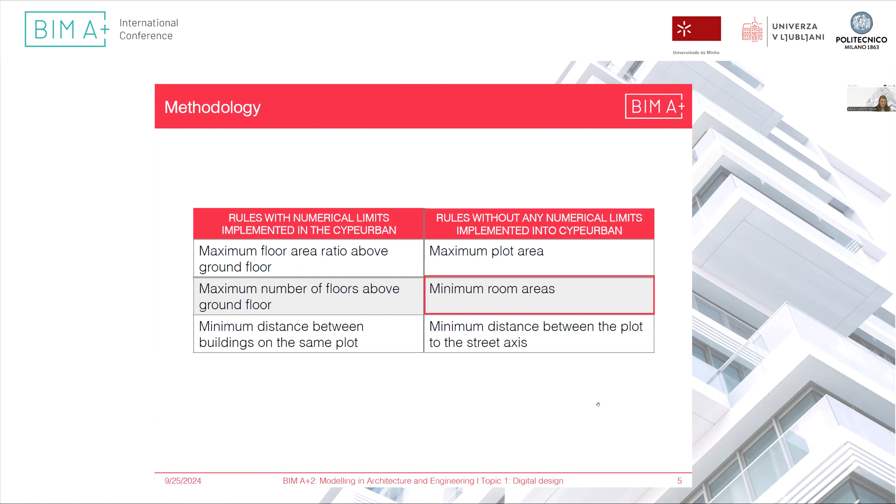These are the 6 rules that we implemented in the software. I'm going to show the minimum room areas in the presentation.

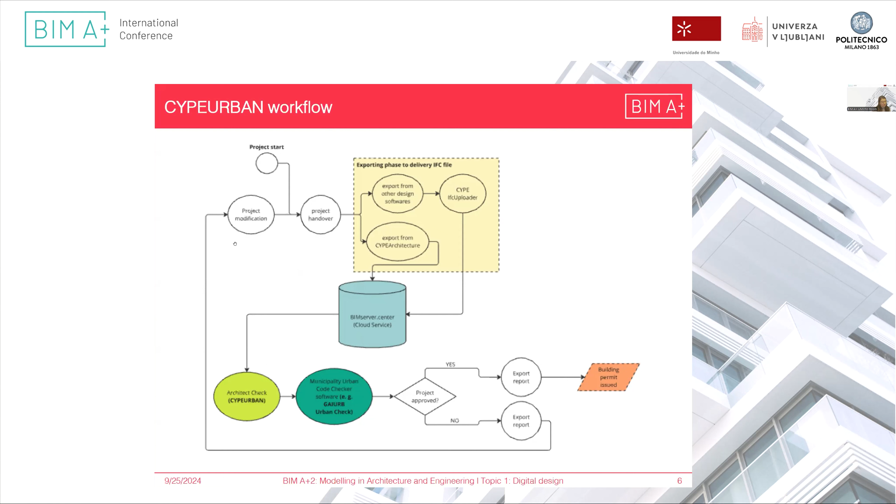This is the CYPEURBAN workflow. We have the project start and the project handover to send to the municipalities. In the exporting phase, if you're using solutions like Revit or ArchiCAD, we can use CYPE IfcUploader, but in CYPEArchitecture you can send directly to BIMserver.center, the CDE from CYPE, and send to CYPEURBAN. Here you can check the legislation of the municipality and send it to a solution at the municipality to check if this legislation is compliant. If the project is approved, we have a report and the building permit issued, but if the project is not approved, we have also a report and a project modification to restart the workflow.

Regarding the rule interpretation and inserting the limits into CYPEURBAN: for minimum room area, we have this statement. If your room is a kitchen contained in an apartment T0 — T0 being a category in the Portuguese legislation — then the net floor area of your kitchen must be bigger or equal to 6 square meters.

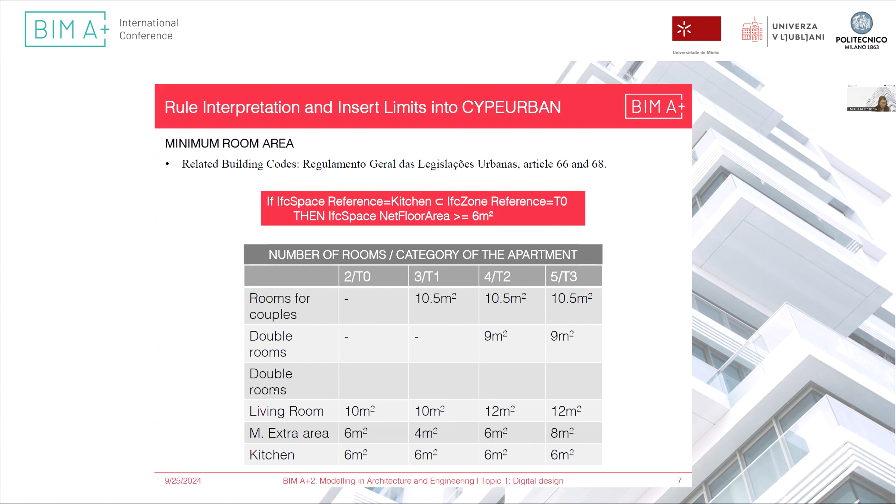Here is a table explaining the legislation. Of course, the table in the legislation is much bigger, but here's an explanation of how the limit is defined in the legislation for each type of room and each category of apartment.

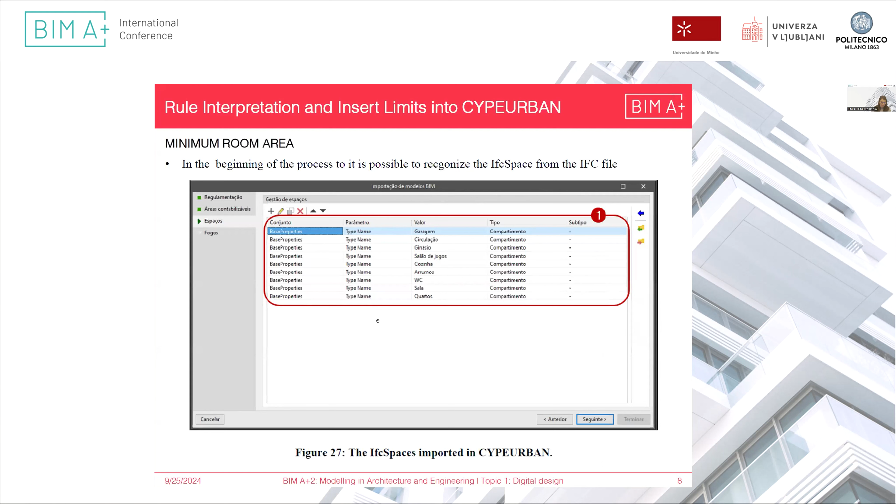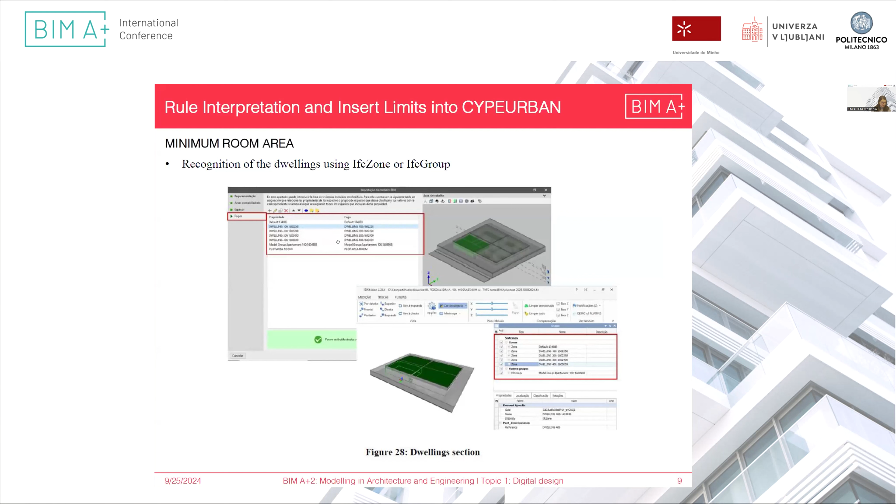Into CYPEURBAN, it's possible to recognize the IFC space using parameters like type name — this is already implemented. Also, we can recognize the dwellings, the apartments, using IFC zone or IFC group — also implemented in the software. Here is a screenshot of CYPEURBAN.

During the case implementation, we discovered a workaround to insert the limits for each type of room. So we have room for couples with a limit of 10.5 square meters, double rooms, and so on. This was discovered during the workaround in the case implementation.

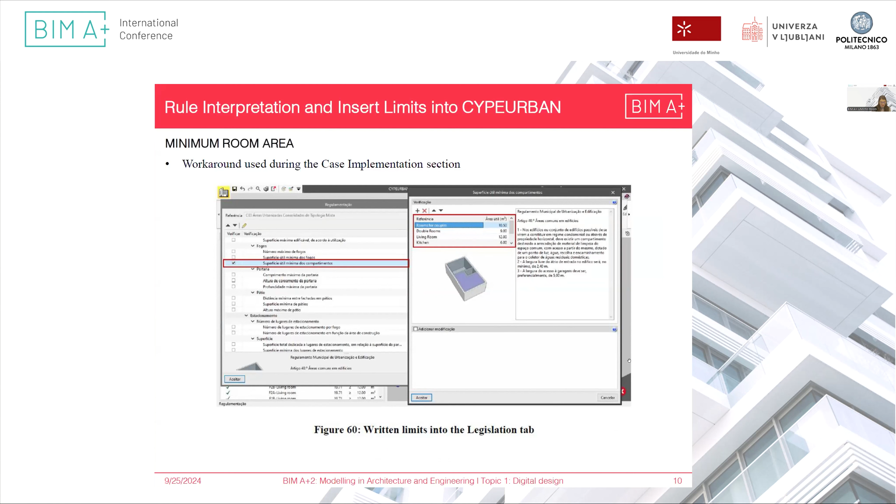In the section to ensure model quality and information, we divided between the architectural IFC requirements and the CYPEURBAN requirements. Here we have the classes IFC space and IFC zone or IFC group. In the IFC space, we need the gross floor area as a predefined type.

And in the Pset space common, we need to input the type of room because we have specific limits for each type. So imagine if you don't insert the correct names like room for couples, and just insert room 1, room 2 — we cannot know the specific limit, because room for couples has a different limit from double rooms. So we need to input the correct names.

Also, the parameter is external. In the quantity sets, we need, of course, the net floor area because we are checking minimum room area.

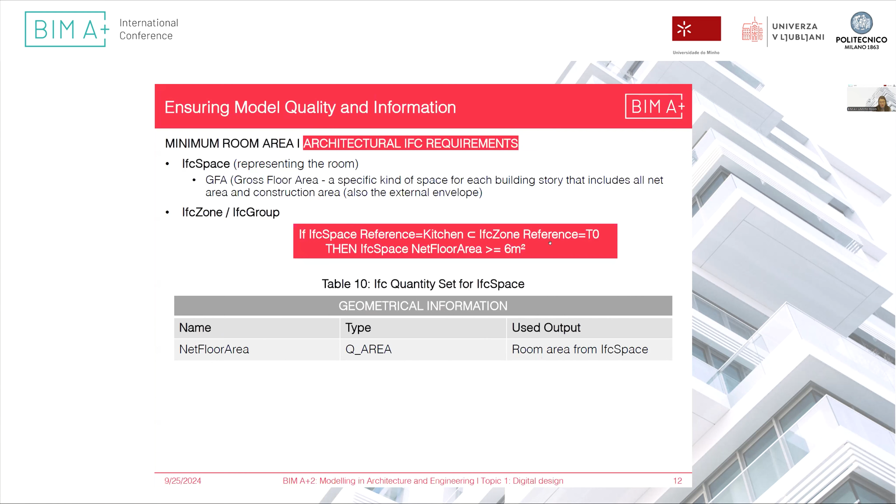In the IFC zone or IFC group, in the Pset zone common, we need to insert the category of the apartment because, as I said, the category is also important — the limit is related to the category of each apartment. And the property is external, as yes or no.

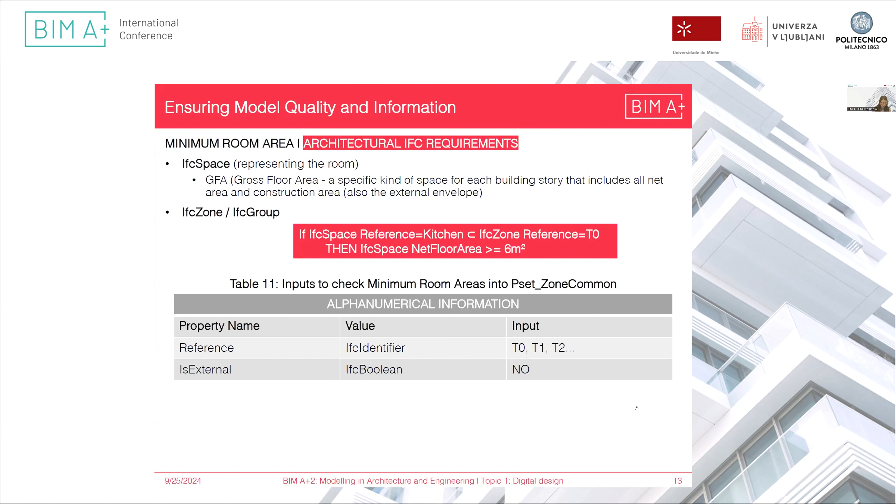In the CYPEURBAN requirements — CYPEURBAN is a software to check compliance with the legislation, so we have the whole workflow to check the legislation.

These requirements are not related to the specific rules we defined, but we need to insert information step by step. So we need to insert the urban area of the project. I believe in all legislation in the world, we need to insert each type of area into the city. Also, we have to configure the countable areas.

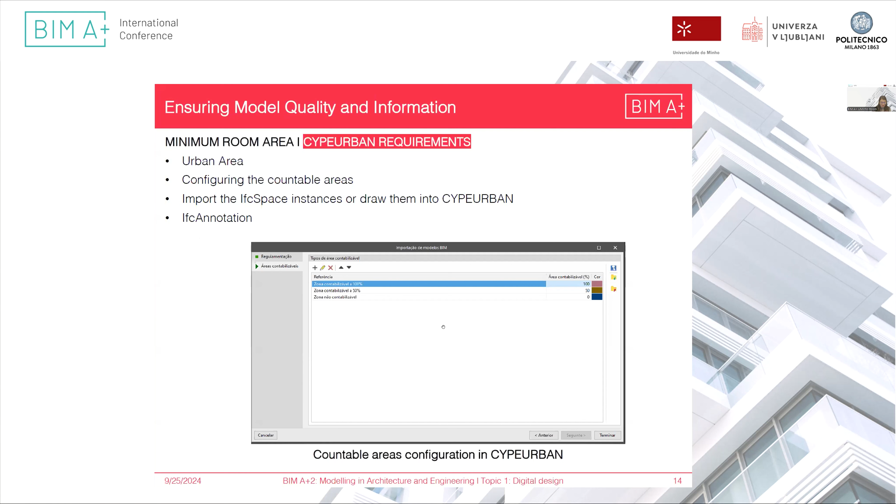Here's the screenshot of the software. Import the IFC space instance, or it's also possible in the software to draw the IFC spaces if there is some space missing in the IFC. Some configuration of IFC annotation is not in the presentation, but it's defined in the dissertation.

We chose Revit as the authoring software solution to explain how to ensure information gets into the IFC. To make sure your IFC file has an IFC space, we can use spaces or rooms in Revit. Spaces are an MEP feature and rooms are in the architectural tab. Both of these elements are conceptual volumes, so they're not like a wall, floor, and so on.

And for both we can set up the IFC parameters, and then we will have an IFC space in the IFC file.

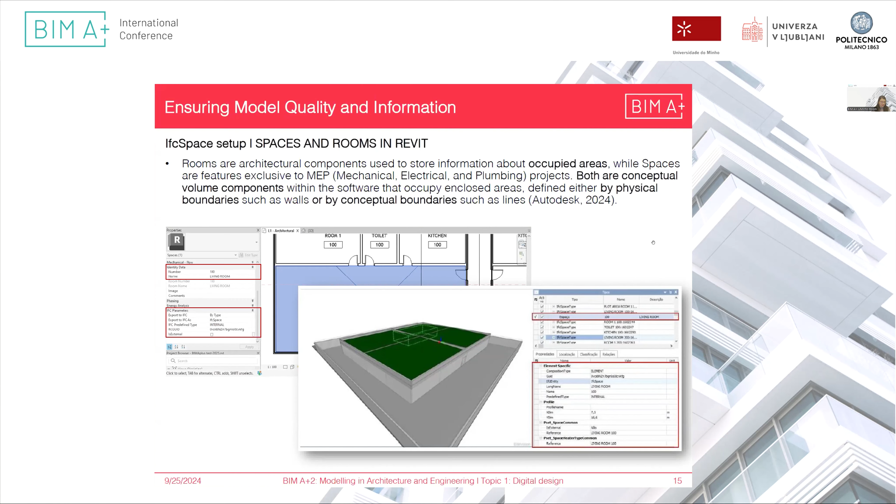For the IFC zone and IFC group, to set these up we have to use zones or groups in Revit. Zones in Revit are also an MEP feature, while rooms and groups can be in other disciplines. I know in other software there is a difference. Again we can set up the IFC parameters, and then in the IFC file we will have the IFC zone or IFC group.

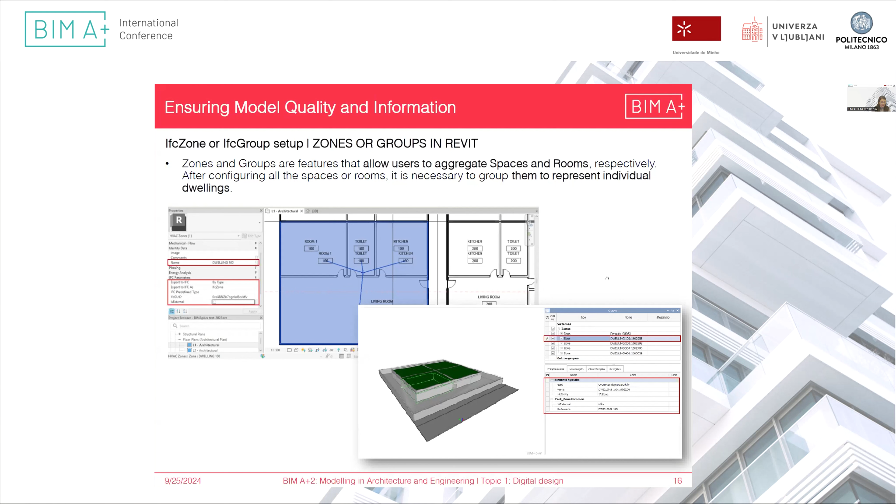It is used to set up the apartment using the IFC zone or IFC group.

For the case implementation, we decided not to use only a house, to have a more challenging project. So we decided on a 7-floor residential building, with only T2 apartments, two apartments on each floor, in Vila Nova de Gaia, as I said.

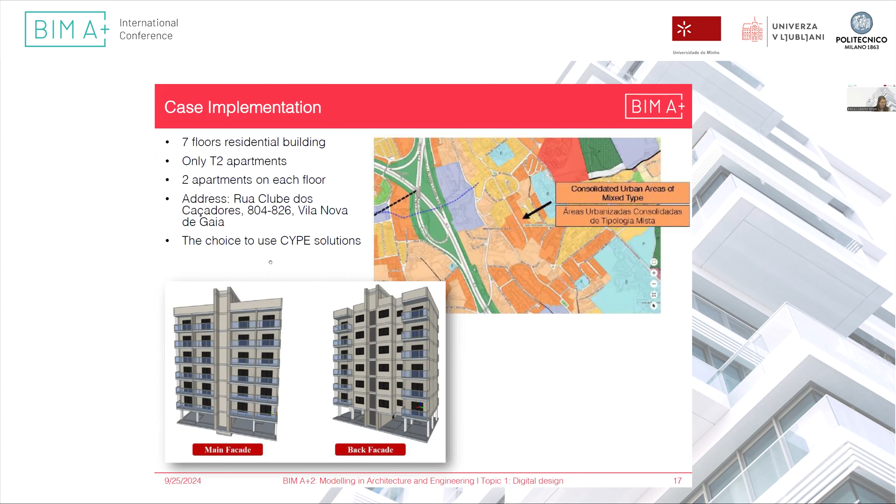As a choice for the dissertation, we used all SIP solutions - CYPEArchitecture, the BIM Service Centers, the CDE, and Open BIM Site as the software tool for modeling the surroundings. This is the project, the facades.

Here is the floor plan. The ground floor is only the access to the project, and then there's a standard dwelling floor with each apartment of a given size.

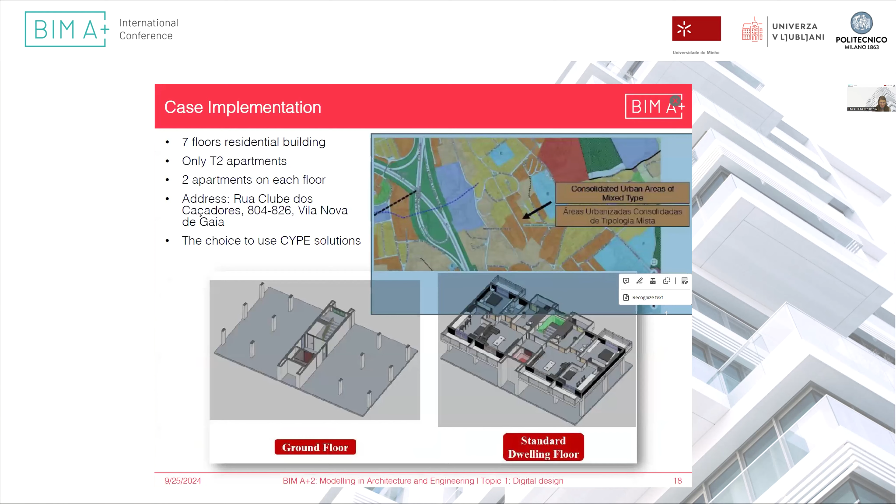Regarding the case implementation analysis, this approach allows us to analyze the software's needs to establish a relationship between the dwellings and the rooms. As we saw earlier, we can recognize the rooms using the IFC space, and we can recognize the dwellings using the IFC zones or IFC groups, but these relationships are not yet built into the software.

There's the possibility of using orthophotos to check distances, though this is less precise than if you model the specific parts of the surroundings, but it's also a workaround. There's also the alternative of drawing an axis or lines into Open BIM Site, the software from CYPE.

The maximum number of floors could potentially be recognized through the actual number of floors above ground, using the IFC BuildingStorey class and the above-ground parameter. So we could check the heights of the buildings and the number of floors using this class, but it's still under development in CYPEURBAN.

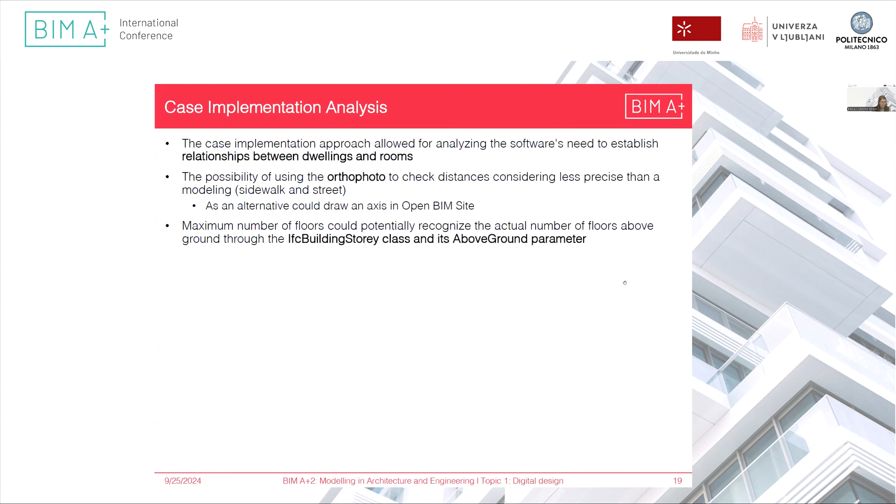For future implementation suggestions for the software, we have the possibility to add the names of the checks. This would be a great improvement for the UX design and user experience.

Another suggestion is to change the owner elements to verification layers or compliance layers. In CYPEURBAN, each check you perform creates a new layer, so having a much easier name to read for this section would also be great for the UX experience.

And automatic recognition from the IFC zone or group as an apartment, establishing a relationship between these entities and the IFC space, probably using the IFC RelAssignsToGroup.

And the incorporation of the BIM Collaboration Format in the workflow, because this whole workflow is already in Open BIM, so completing the workflow using BCF would be a great addition.

As a result and conclusion, I've inserted some points here to present, but it's not all the conclusions from the dissertation. Regarding building permit approval, it's closely tied to cultural procedures - meaning in the municipalities, people have been working on approving projects for many years, doing the same tasks for many years. So it's not just a matter of implementing a technological solution and everything being resolved.